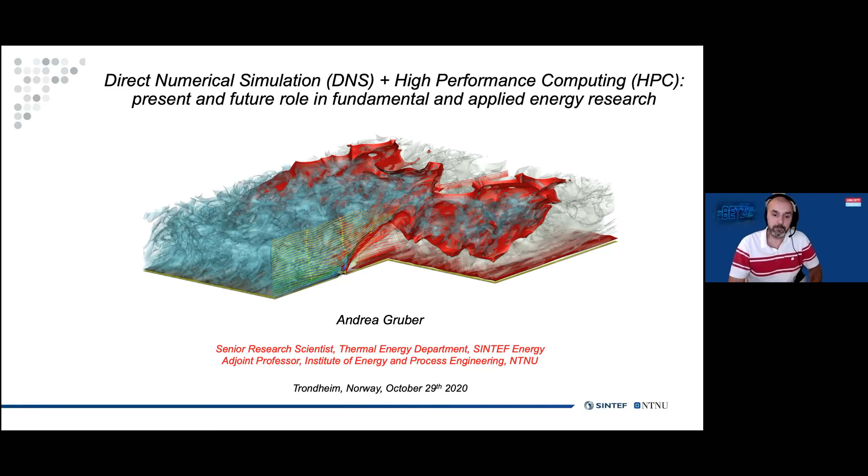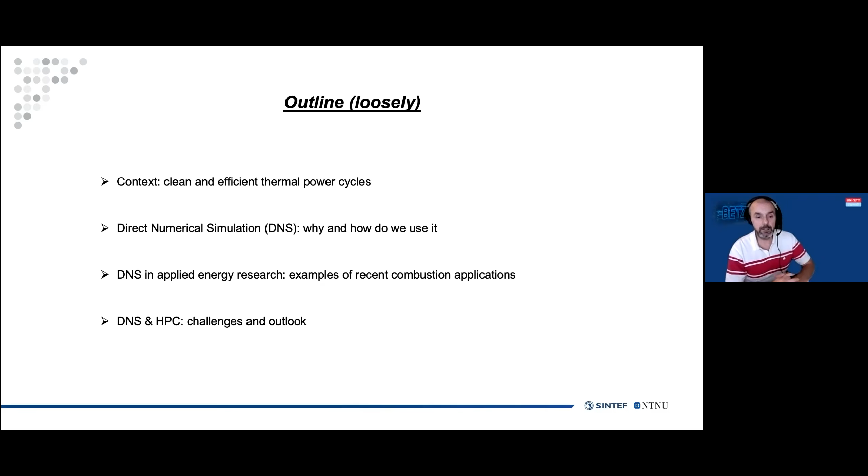So first of all, a brief outline of my presentation. I will provide the context about the clean and efficient thermal power cycles, so why we do this research, and then I will provide an overview over the methodology that we use and why we need high performance computing to do that. Then I will also provide some examples of use of supercomputing in this context. And finally, some challenges, future challenges and the outlook.

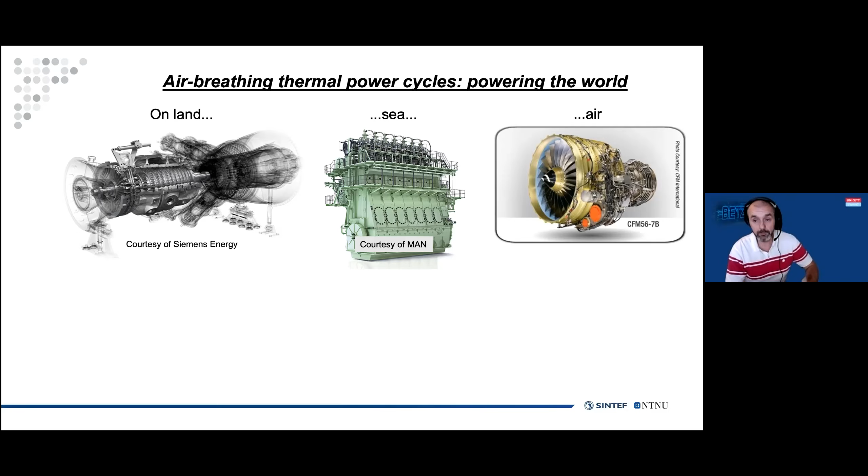So, air-breathing thermal power cycles. As I say here, they are powering the world today. They go from gas turbines for land-based power generation to reciprocating engines, and to aero gas turbines for airborne travel. They have in common that they leverage on a working fluid, which is air, utilizing a very small amount of fuel in comparison to the working fluid to produce mechanical work or electric power.

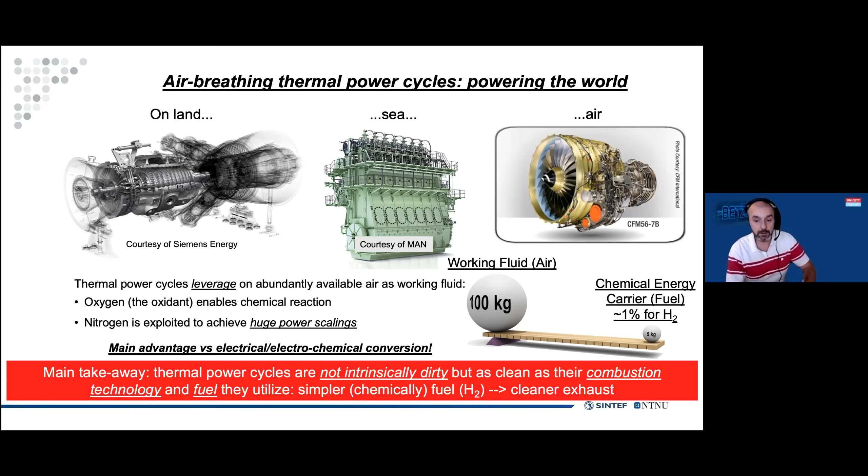So they use the oxygen as an oxidant to enable chemical reaction, but they leverage on the nitrogen, which is available in the air, to achieve huge power scaling. And this is the main advantage of these cycles in respect to electrical and electrochemical conversion, which cannot enjoy this huge scaling. So the main takeaway here is that thermal power cycles are not intrinsically dirty, but as clean as their combustion technology and fuel they utilize. So simpler fuels chemically mean cleaner exhaust, and hydrogen, which we are studying at SINTEF Energy Research, is one of such fuels, very simple and very clean.

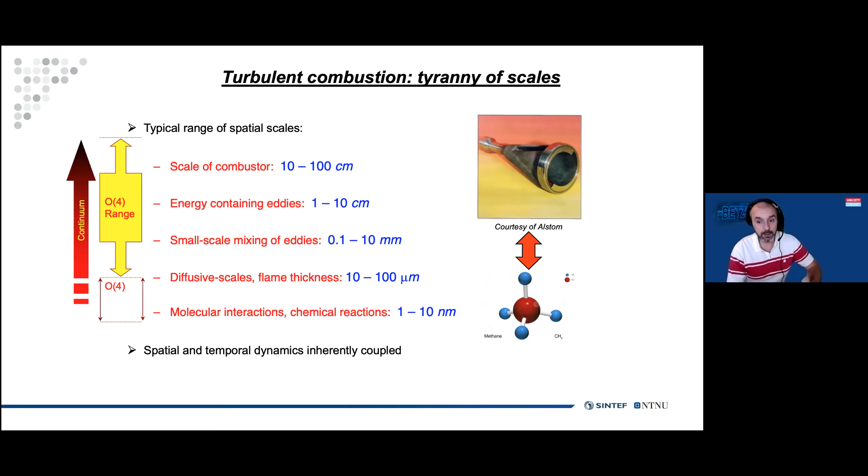So the problem in combustion devices is turbulent combustion. There is a tyranny of scale, as I call it here, because there is a wide range of scales that have to be considered. Typically, we look in our work at the continuum, which is comprised between the centimeter or meter scale to few micrometers. We don't go further down in this scale, but this already represents a huge challenge. So all the spatial and temporal scales that are spanned here are intrinsically and inherently coupled.

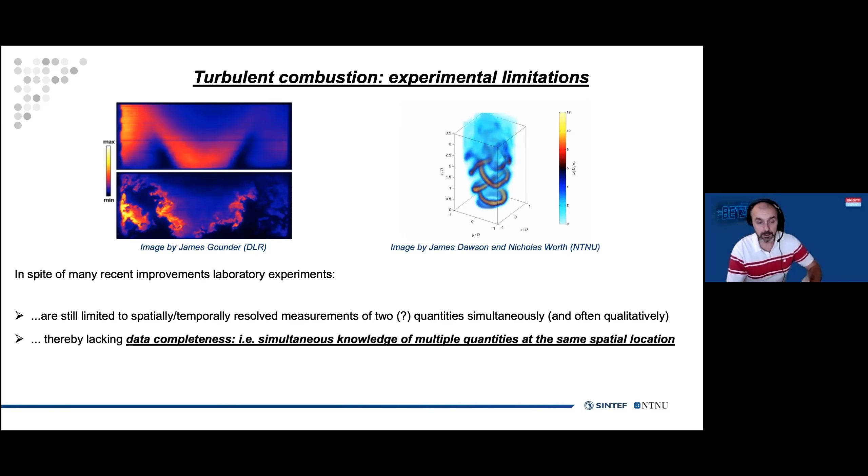Of course, experimental measurements and laboratory experiments can provide some insight about these processes, but they are still limited to few quantities simultaneously. So what experiments still lack today is what we call data completeness. So the knowledge, which in many cases is badly needed, about multiple quantities at the same spatial location and simultaneously. So this can hardly be achieved by experiment. And this is where the modeling technique that I will discuss today comes to help.

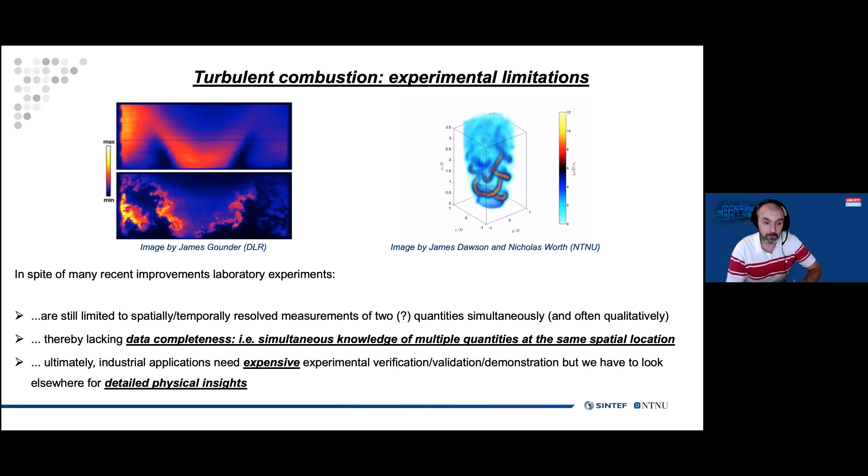Ultimately, industrial applications need expensive experimental verification, validation, and demonstration. So experiments are always needed, but they are very expensive. And so it's important to limit their use. But for detailed physical insights, we have to look elsewhere.

So in the industry, CFD or numerical modeling of turbulent combustion processes has been used for decades now. And the most common approach is called Reynolds Averaging, in which the equations of motion are averaged. This is computationally affordable, and it's therefore widely deployable in industry. However, it gives limited accuracy for complex flows that are highly curved, or have swirl. They have also limited accuracy for reactive flows, especially when you are looking for complex kinetics or emissions.

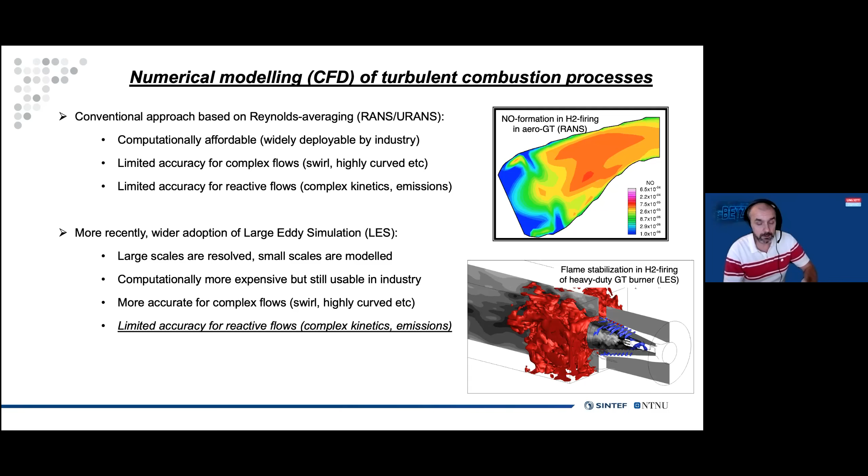More recently, there has been a wider adoption of large eddy simulation, which resolves all large scales. So these are represented correctly. However, the small scales are modeled in LES. So LES is computationally more expensive. It is used to a lesser extent compared to RANS, but it's still usable by industrial actors, and it's also more accurate for complex flows.

However, it still has limited accuracy for reactive flows, because chemical reactions are rate controlled by the small scales, which in LES are still modeled. So the main takeaway here is that to date, RANS and LES approaches have played a peripheral role in industrial R&D, in the energy field at least.

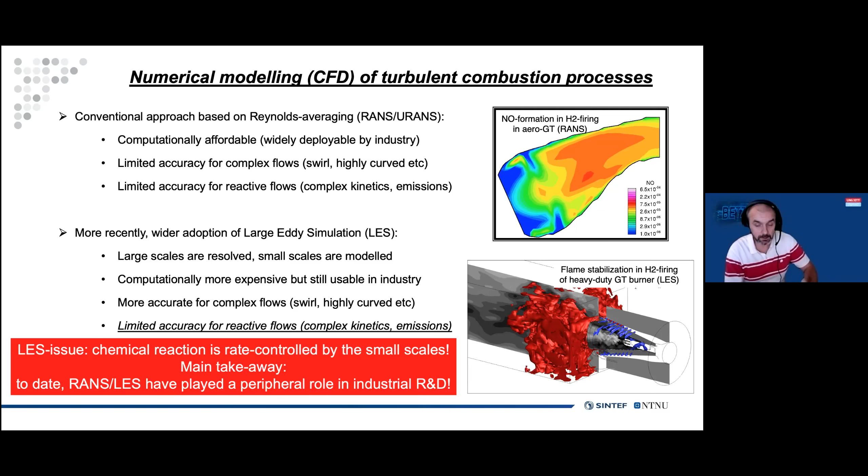Therefore, we have proposed years ago the use of direct numerical simulation in this context. First, a definition. So I use this by Coleman and Sandberg. DNS is a numerical experiment producing a series of non-empirical solutions from first principles for a virtual turbulent flow. As such, DNS provides a complete knowledge unaffected by approximation at all points within the flow, at all times within the simulation period. So, of course, this is very good because it gives both data completeness and very high accuracy.

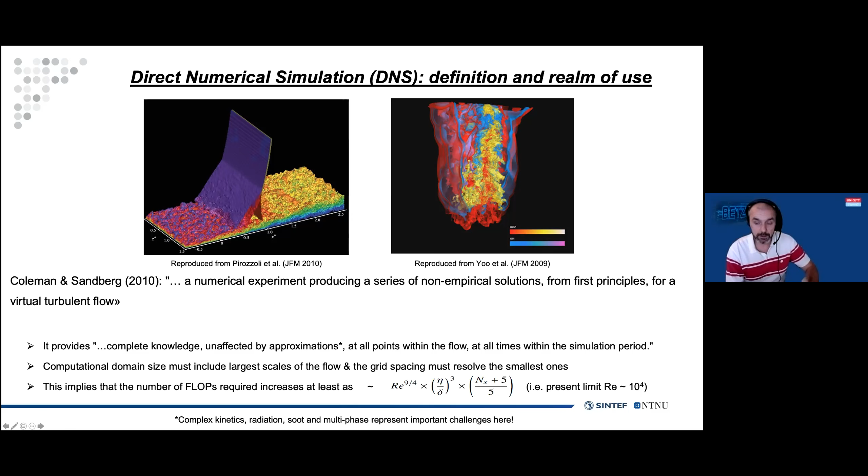However, the computational domain size must include the largest scales of the flow. So the computational domain has to be as large as the largest scale. And also the grid spacing must resolve the smallest scales. The bottom line here is that this implies that the number of floating point operations required increases at least as an exponential of the Reynolds number, of the domain size and of the number of species that I indicate here as NS.

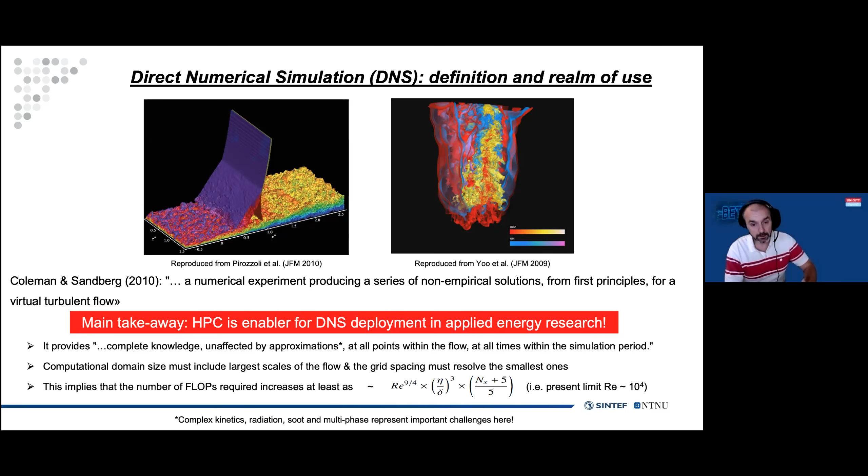So presently, this really limits the Reynolds number of flows that are representable by DNS to approximately 10 to the 4th. The main takeaway here is that high performance computing is needed by DNS and for its deployment to applied energy research. Without high performance computing, DNS will not be usable in this context.

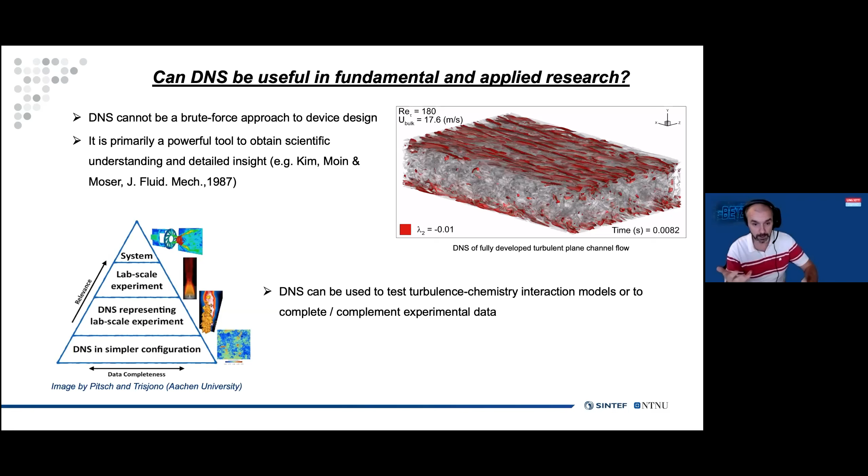So, can DNS be useful in applied research? Well, first of all, I can say that DNS cannot be a brute force approach to device design. So we cannot use it on the design of full geometries and complex geometries. DNS is primarily a powerful tool to obtain scientific understanding and detailed insight. Also, DNS can be used to test turbulence-chemistry interaction models, so to test coarser models and to see how good or bad they are, and to complete and complement experimental data.

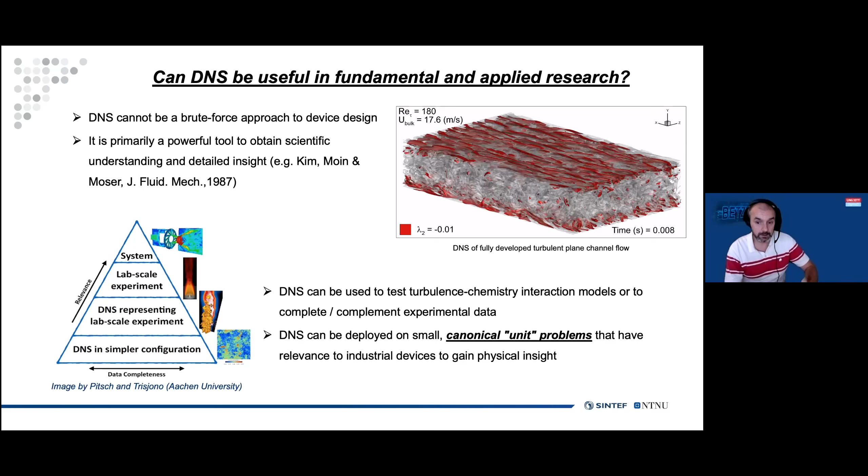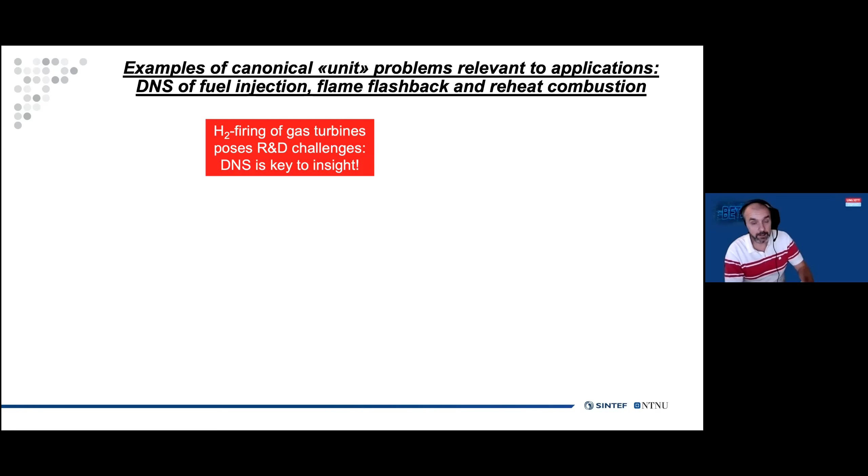Also, and this is what we have done mostly at SINTEF, DNS can be deployed on small canonical unit problems that have key relevance to industrial devices to gain physical insight. So here in this talk, I will present very briefly 3 examples in which DNS has been used in these canonical unit problems that are relevant for application. The main reason why we do this is hydrogen firing of gas turbines, which poses important R&D challenges because of the high reactivity of hydrogen. And DNS here provides key insight.

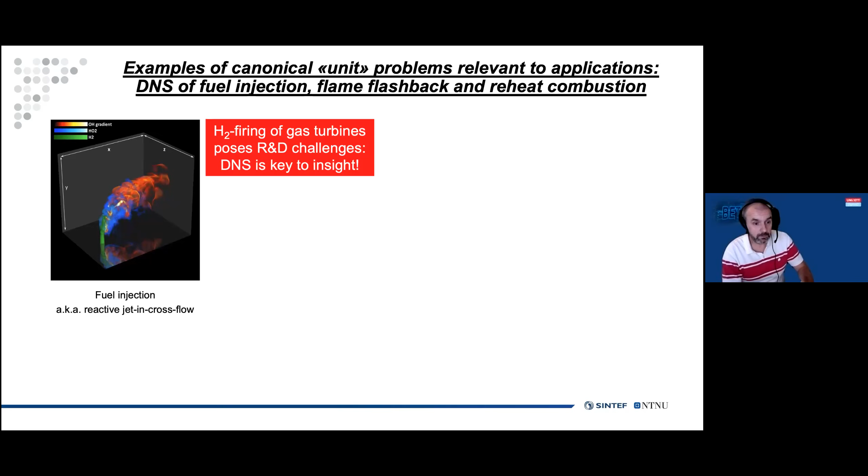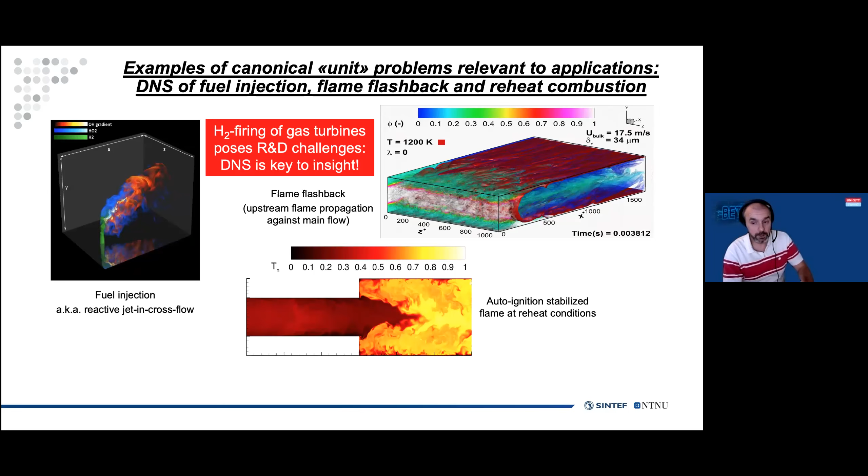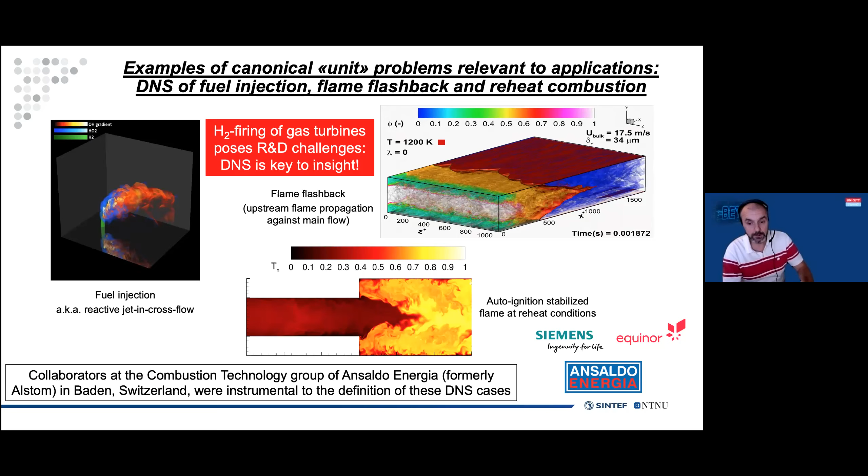So one problem is the fuel injection, also known as a canonical problem, the jet in cross-flow configuration. Another problem is the flame flashback, in which a premixed flame moves away from its stabilization position in an unwanted direction. And also, we have used DNS to examine auto-ignition stabilized flames at reheat conditions. I will come back to what this means in more detail. I have to acknowledge, of course, our collaborators at the Combustion Technology Group of Ansaldo Energia, formerly Alstom, in Baden, Switzerland, that were instrumental in the definition of most of these DNS cases.

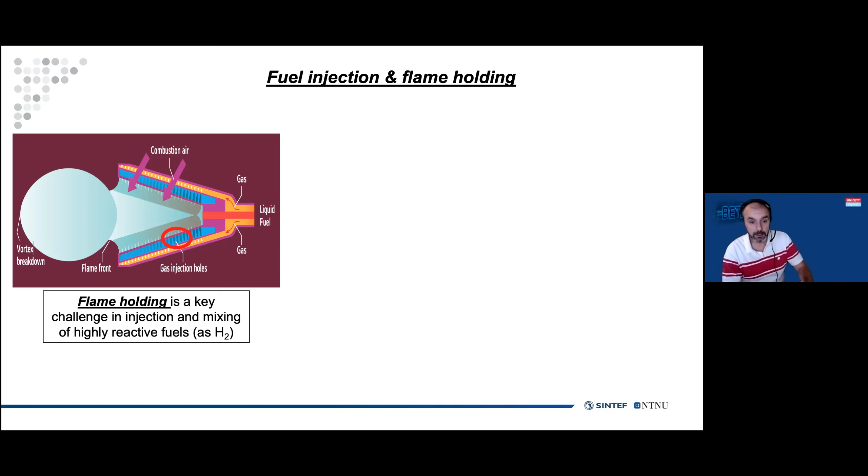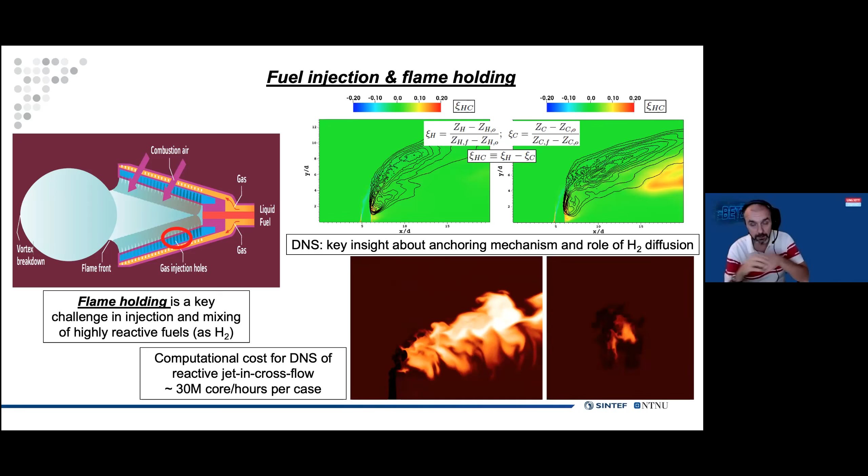So going to the fuel injection problem, we have a typical gas turbine combustor in which the fuel is injected through small nozzles. And the problem is especially for highly reactive fuels such as hydrogen. A typical computational cost for a DNS of a fuel injection problem, as you see here, is approximately 30 million core hours per case. And the DNS has provided key insight about the anchoring mechanism and the role of hydrogen diffusion in facilitating the flame anchoring. I don't really have the time to go into detail here, but the bottom line is that experiments and coarser CFD modeling could not provide this insight that is key for the development of these injection systems.

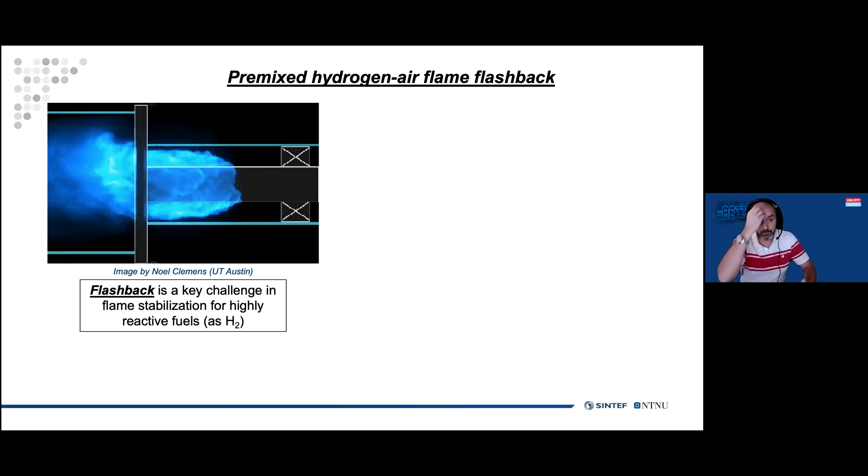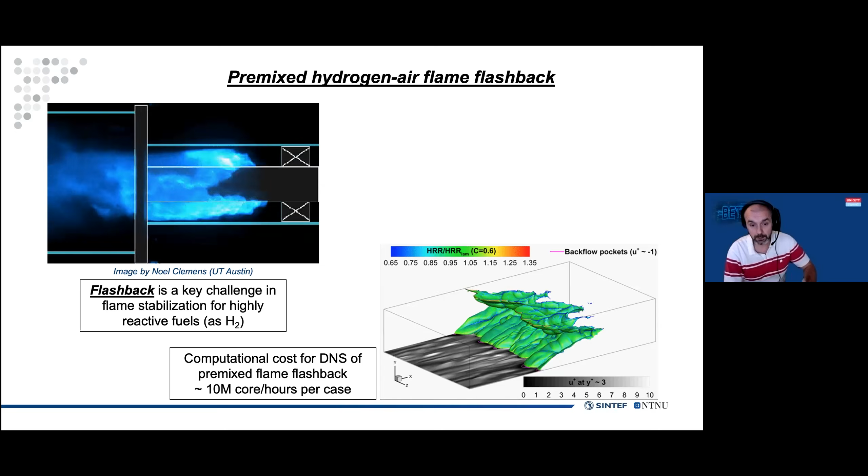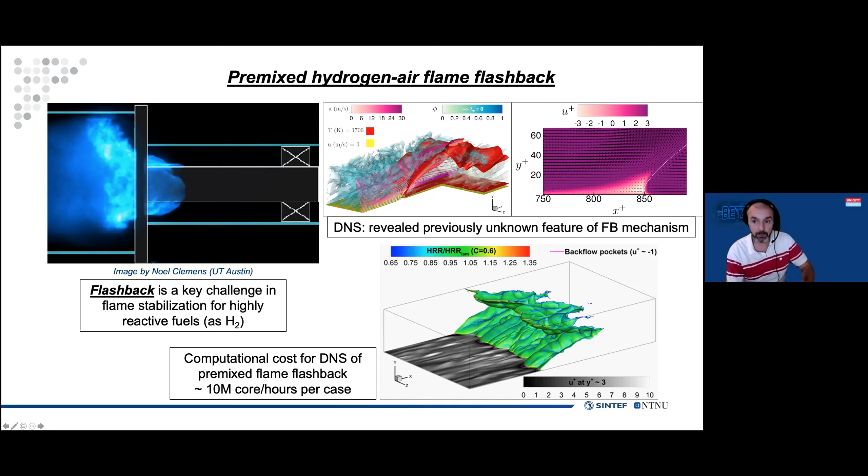The next topic is the flame flashback that I show here in an experiment by Noel Clemens at UT Austin, in which the flame moves upstream from the stabilization location on the left towards the right. So flashback is a key challenge, especially in flame stabilization for highly reactive fuels such as hydrogen. Here we have done DNS calculations of this configuration, and they cost approximately 10 million hours per case. And here too, DNS revealed previously unknown features of the flashback mechanism. What I show here in the picture is the flow reversal that happens just upstream of the flame front, which was previously unknown, and that has helped explain how flashback takes place, and therefore how it can be mitigated.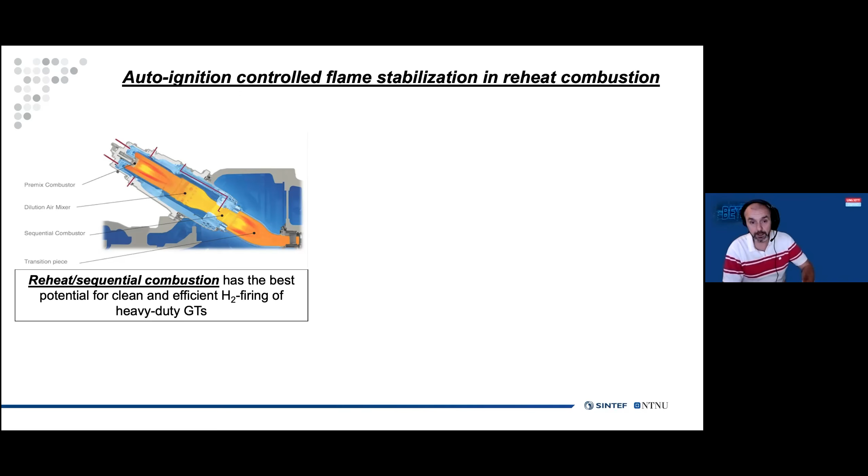Finally, I mentioned the auto-ignition controlled flame stabilization, which is, in heavy-duty gas turbines, the technique with the best potential for hydrogen firing. Here we have conducted DNS of a hydrogen flame at reheat conditions, so in this specific and very unusual combustion condition. And in this case, we have also had to use a slightly more complicated geometrical description of the combustion system, which you see here is implemented through a multi-block grid. This was the most expensive case we have done to date, and it costs about 50 million hours per case.

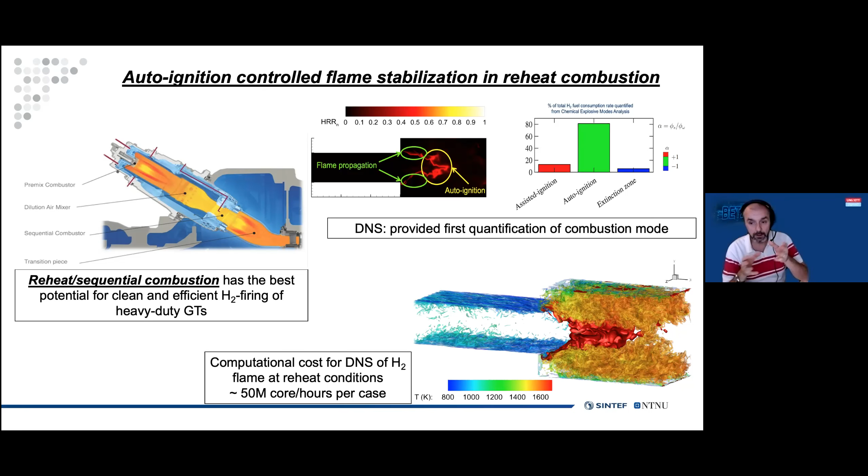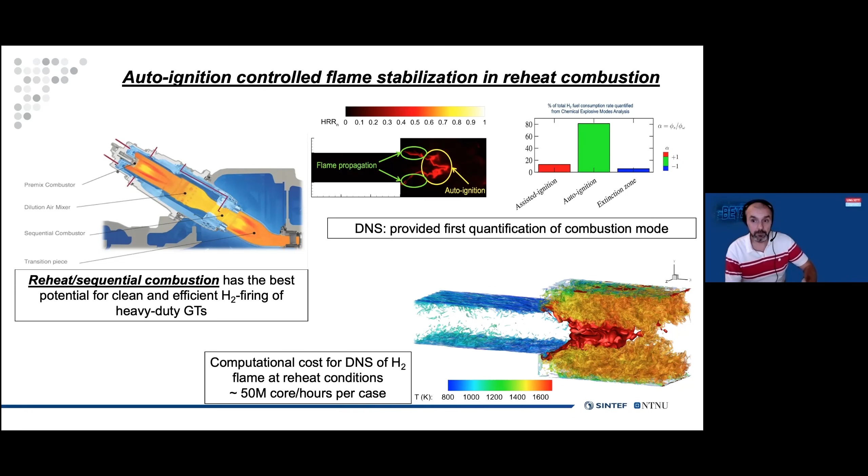Here, DNS has provided the first known quantification of the combustion mode in this system. Due to the very specific geometry of this combustion system, part of the flame is auto-ignition stabilized and part is propagation stabilized. And for the designer of this system, it's of key importance to have a quantification of how much fuel burns in auto-ignition mode and how much fuel burns in propagation mode. And we have provided that through the use of DNS. So these three cases show the way we have utilized DNS to acquire information and insight that is otherwise not available by any other means.

Before concluding, I would like to explain some of the challenges that I see at the horizon here. So first of all, we use what is called MPI parallelism in explicit spatial differentiation and temporal integration that has been an enabler to date. The domain decomposition is done among the MPI processes, and each MPI process is handling approximately 20 cube or 50 cube subdomains. So this surface to volume ratio is an important parameter in the optimization and varies case by case, for example, depending on the chemical complexity.

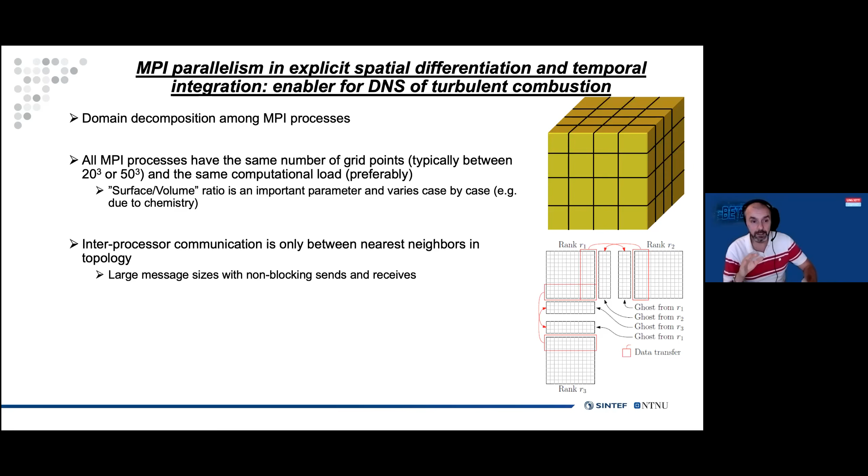The inter-process communication is only between nearest neighbors. And the fact that you have very limited all-to-all communication makes this approach very efficient in scaling up to higher number of cores. So when we transition from petaflop to exaflop scale, this will allow larger domains and/or larger Reynolds number.

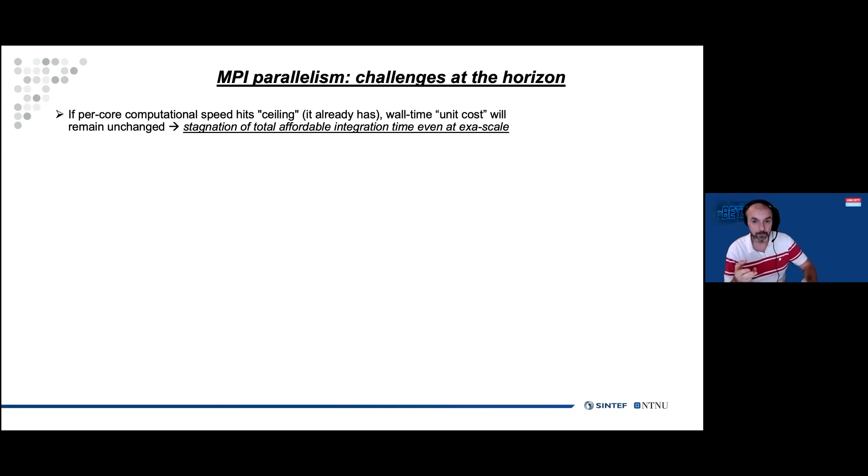But there is a problem. The problem is that if the per core computational speed hits its ceiling, and it already has, the wall time unit cost will remain unchanged. This means that the total affordable integration time of the physical problem will stagnate. And I will show on the next slide that this has already happened, really.

A 1,000-fold increase in supercomputer size also implies that node failure will happen more frequently and a larger distance in the machine architecture. So there must be in place a robust failure recovery mechanism. This means in practice that we have to migrate sooner or later from a synchronous MPI framework to an asynchronous data-aware task-based approach, as an example, Legion, and we have already started to do that. This will provide improved parallelism, load balancing, robustness against failure and scheduling flexibility.

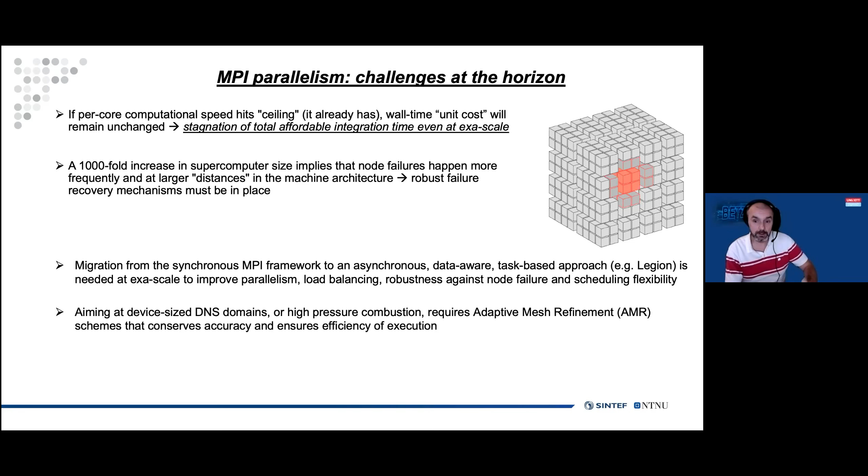Also, when looking at DNS of high pressure combustion, for example, or at larger devices, larger grids, we will need new methods to do adaptive mesh refinement, which in DNS is not state of the art yet. So all of the above further separates the application implementation from how the application is mapped to the system resources and executed. And this means that we will need a closer collaboration between physicists like me and the computer scientists that design these codes.

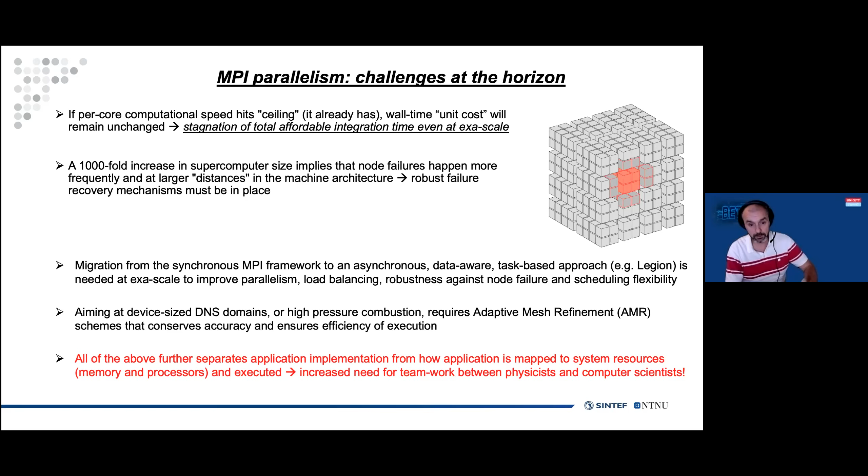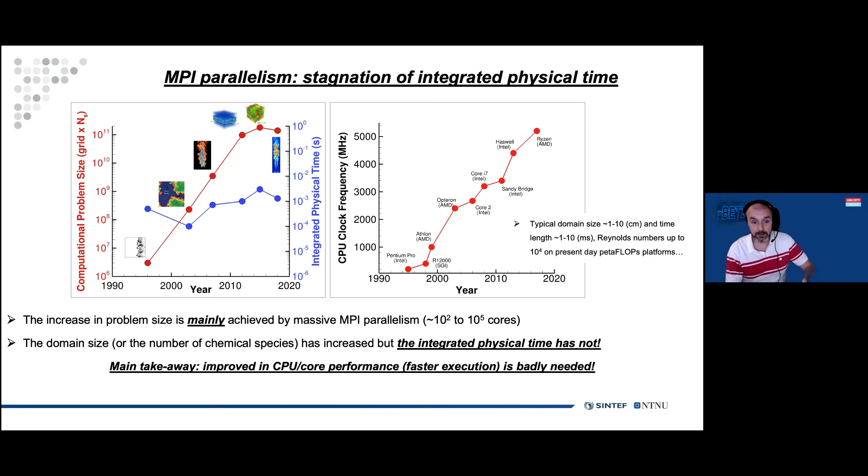But the worrying part here is that the integrated physical time has not increased that much and has in a way stagnated. The reason for this is that, assuming highly optimized code, the time needed to compute each subdomain has stagnated due to the fact that the CPU core performance has stagnated.

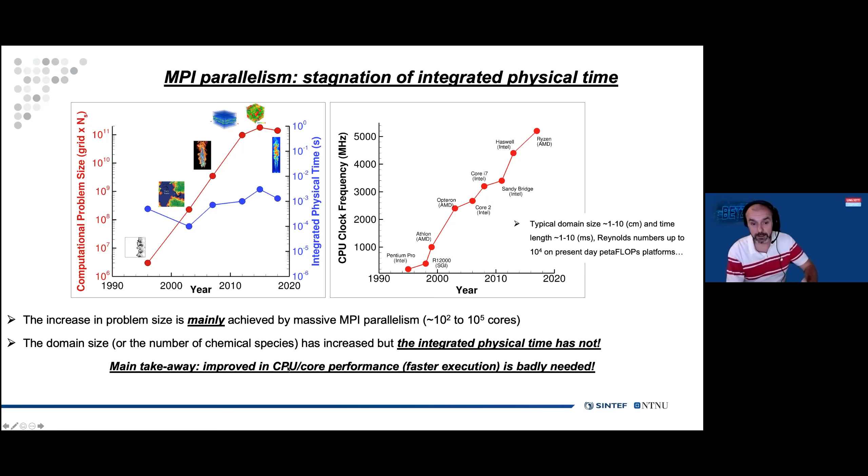So the main takeaway here is that in the future, an increase in CPU and core performance, so a faster execution, is badly needed. And a transition to GPU-based high performance computing, while it is helpful for point-wise operations, is not very helpful for spatial derivation. So that will not solve all problems.

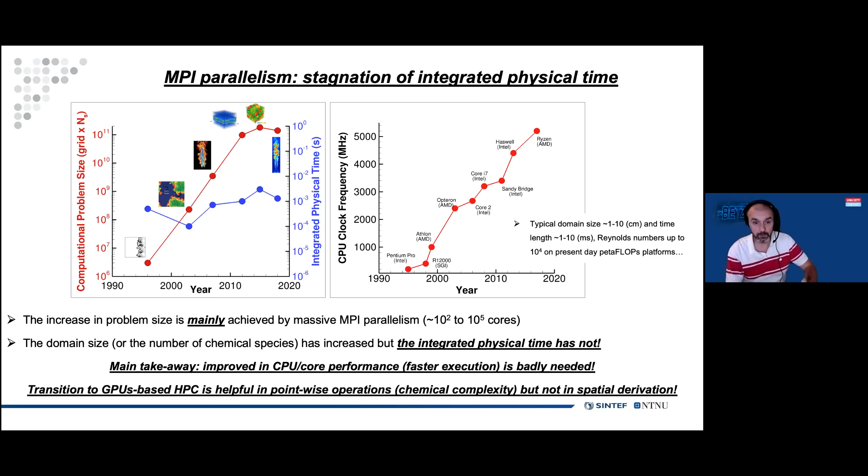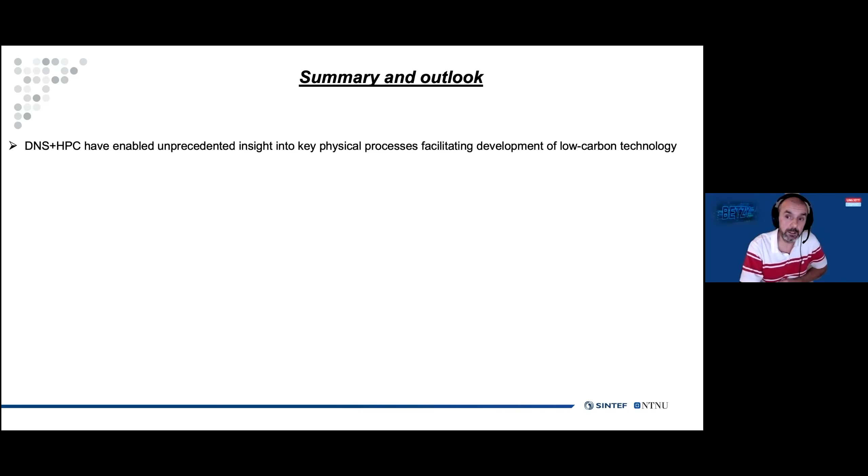Finally, my summary and outlook. Direct numerical simulation and high performance computing have enabled unprecedented insight into key physical processes, facilitating development of low carbon technology. DNS is now a mature fundamental research tool, and early adopters have also brought this into research and development of applied combustion equipment. The transition to exascale will automatically allow DNS at high Reynolds number, larger domains, and more complex chemical kinetics, but not necessarily all of this at the same time.

It is clearly recognized also that algorithmic improvements, for example, Legion and adaptive mesh refinement, are necessary to proceed significantly closer to device size DNS calculations. In general, proper DNS of turbulent reactive multi-phase flows is and will remain elusive. This is due to the complexity of multi-phase and the fact that even the basic models are not easy to represent even at the DNS level.

So finally, important limitations have to be expected in performing DNS of slow processes that are characterized by long time scales. And this is due to the integrated timescale limitations that I have referred to.